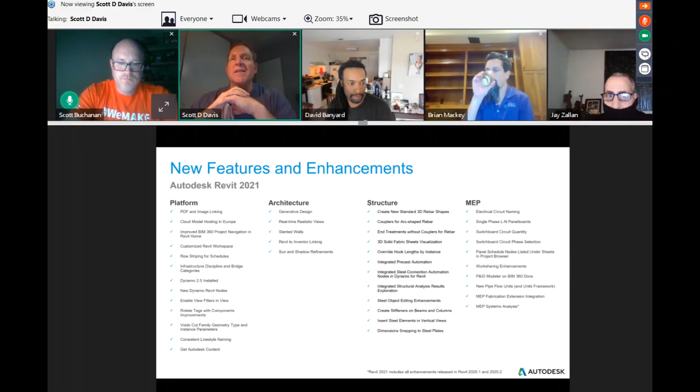Let's get that going. It is. You're sharing, Scott. Oh, it is. Okay, good. Well, I'm looking at a camera beyond. I'm looking at my own video.

All right, so platform stuff. Here's one where the work really started last year in 2020 and has improved in 2021. So last year we started the ability to actually insert PDFs into your views and sheets and things like that inside of Revit.

Well, obviously, if you've got a lot of PDFs and you're using 600 DPI, 30 by 42 PDFs, and you're trying to stick those in sheets, the more of those you put in there, it was doing a lot with file size and things like that. Just a lot of graphic information as an image file to bring in.

But you can also link it from a BIM 360 page. So if you guys are using BIM 360 Design or BIM 360 Document Management, you can actually store those image files or PDFs there and link them through the cloud, so everybody's using the exact same version of those documents all the time.

You also see... oh my God, the name just escaped me, where you're actually not naming a drive letter, you're just going a relative path, I guess I'm trying to say. There it is, it's right there. So relative path linking, etc.

Obviously, this is going to help with being able to have those PDFs and image files linked in, and then not do so much with file size and file bloat because they're just referencing in from an outside source. So great new advancement there.

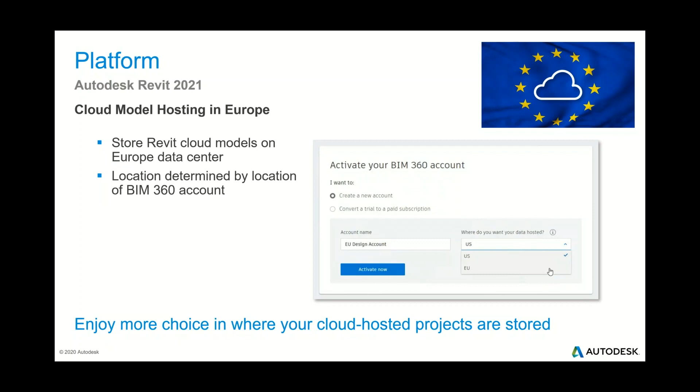Which one do you want to go into? Do you want to use the US server? Do you want to use the EU server? Obviously, there's a lot of territory rights and things like that going on. Some customers said that they had to have their data in Europe in order to use a service like BIM 360 Design. So a new welcome feature there for sure.

But it's really about separating out between recent files and the BIM 360 area, and giving you a much easier way to search. Just like if you're inside of BIM 360 in the web page and you have that drop-down list at the top where you can start typing in some characters, the name of the project you're in, it starts to filter that list out for you very quickly, and then you can go right to the project that you're ready to go into.

Now you're looking at your BIM 360 projects. You have this drop-down list at the top for both your accounts and your projects with a search box where you can search through these things. It makes it really easy to do. And we provided a link directly inside of Revit that takes you directly into BIM 360. So no more having to go launch a browser, then type in a URL, or go to a shortcut.

Those are all readily accessible right inside of Revit for you now as well. And then the last thing is just some easy access down to the help files, some of the online help, the what's new, which went live today.

That's one of the big points about doing this for you guys here in North America. This user group is actually the first one that I presented to. I'm sure you guys have seen a lot of things coming out today, but everything in Revit 2021 went live at some point today. I don't know exactly what time they flipped the switch, but now you should be able to go and get downloads. Your Autodesk desktop app should be notifying you that there's new versions available. The 2021 help file should be live, and I've seen a lot of bloggers and posts and things going on today all around Revit 2021. So that online help will take you to the 2021 page.

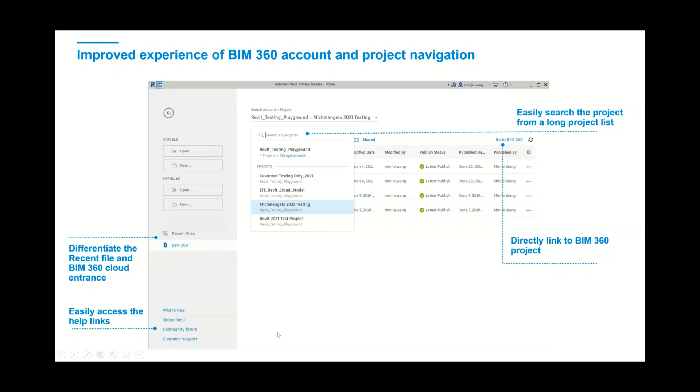Also, when you first get Revit 2021, download it and install it, as you're going through the initial setup, the one thing it's going to actually ask you first is a few questions if you want. You can dismiss out of this, but if you want Revit to help you set up a customized workspace for you, rather than just installing Revit and having every single tab turned on for all the disciplines, which you can still do, it's actually going to ask you, what do you like to work in? Are you an architect? Do you like to work in infrastructure?

That's one of our new categories I was talking about. What's your job role? And then what it's going to do is it's automatically going to set up Revit particularly for that, what you select on that. So in the case I turn architecture on and infrastructure, let's say it's going to have the architecture tab and the infrastructure tab turned on by default. Nothing says that that's permanent. Obviously, you can go back in and change those at any time.

The one thing it's not doing yet, and I'm sure development is working towards this at some point, is to then be able to save those as a user profile. So if you logged in, you could actually say, I want to save a profile called architecture because we're a multidisciplinary firm. And then I have another profile that's called MEP, and just easily switch those profiles, and it would switch the user interface around for you. But at least get you a little bit more of the way there upon install.

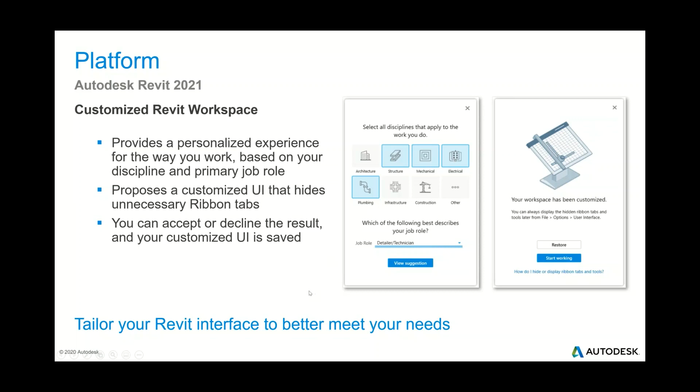Hey, Scott? Yes. Real quick, so is that just so they can track all of our movements rather than giving us full control or full access to all that data? Sorry, continue. I'm not sure what you mean by 'they'. I think maybe I know who you're talking about, but that's all right. No, it's not out there for us to track all of that.

All right, so this one's actually really big for anybody that's ever had to work on just monstrous schedules. This goes back to my own experience of being a project manager back when I was in practice, of actually printing out 30 by 42 drawings and having them on the desk next to me with a highlighter, trying to go from sheet view, real sheets to the computer screen, and trying to understand what row I happen to be on as I was trying to go through a door schedule or window schedule. And so now, just like Excel spreadsheets, one of the schedule properties is that we can actually tell it to stripe the rows, and we can tell it which colors we want them to be.

We've had a little bit in warm-ups today, a little bit of technical difficulty with some of our videos, but what we're going through right now is just showing you a view. It's actually in German, you can see in the tab up there at the top, a long scheduled list. On the right we're looking at that same schedule on a sheet. This is where your eyes would probably go crazy without being able to have this striping.

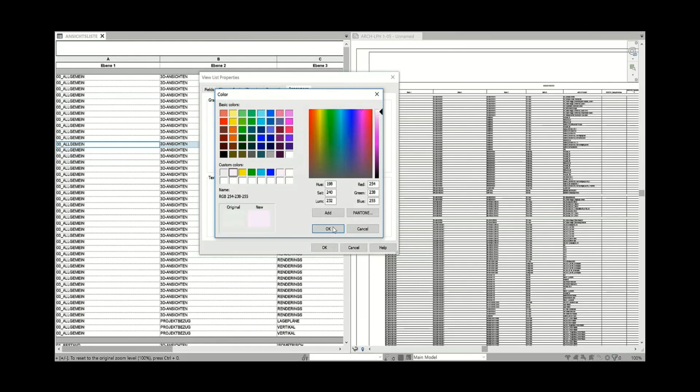So we're going to go ahead and say, first and foremost, show the stripes on the sheet. And then we're going to go ahead and pick some of our colors. We're going to pick our first color here, in this case this kind of pinkish color. We're now going to pick a second row, and then bam, in just a second the schedule view and the sheet view both update with those stripes.

And if you don't want to see it on the sheet, you could uncheck that, and then it's going to go away in the sheet and still show it to you in the schedule view as well. So just a much easier way of being able to understand schedules, especially when you have something on the right, which is a full page, 30 by 42 of one giant door schedule or window schedule, and you're trying to make your way around that. Should make it much easier for you guys as well.

So there are some new categories this year. You guys that have been in Revit for quite some time know there's always been architecture, structure, mechanical, electrical, piping. There's a brand new category this year called the infrastructure category. Maybe that roads category that's actually in Revit will someday become something. I don't think we did anything with it yet, but for those that have used Revit for a long time know there's been a category called roads for quite some time. But this new infrastructure stuff is actually more in line with what we're doing around bridge design.

So Revit's become a very powerful bridge design tool, especially when coupled with something like InfraWorks to do some pre-planning. You can actually lay out a bridge in InfraWorks, and there's a workflow to take that information from InfraWorks, bring it right into Revit, and then start doing your detailing, doing some rebar and some other concrete work. Scott's going to show you some of the new rebar tools we have in a little bit. Along with that comes a whole bunch.

Yes sir, sorry to interrupt. Last month when Marcelo was in doing some of his work, in the Rhino Inside Revit presentation he gave us, he actually used the roads category. Oh did he, alright. I'll have to talk to Marcelo and see what he did with it. Getting geometry, and he made roads, and in Revit they were roads. It was great, so nice. Just wanted you to know that. Yeah I may have to go back, did you record that session? I may have to go back and watch it and see what he did.

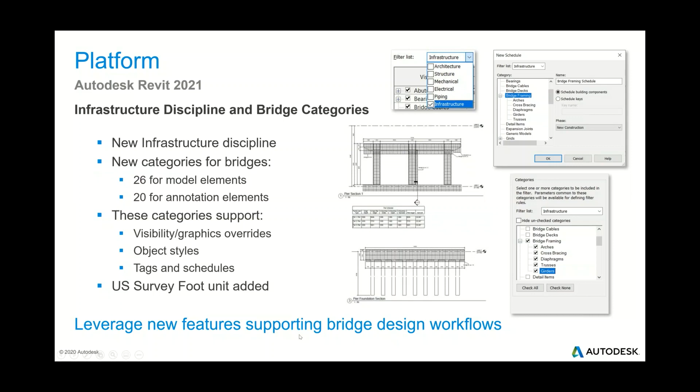All right, Dynamo. It's not new to 2021, but what's new is that it's Dynamo 2.5. In 2020 it was Dynamo 2.1, if I remember correctly. What we've done is made install of Dynamo mandatory for this release of Revit, meaning we've coupled Dynamo 2.5 to Revit 2021.

In the past, before we were doing this, you could go out and grab a build of Dynamo and install it on top of whatever version of Revit you were working in. So in an office or on your team, you might have somebody working in Dynamo 1.2 and somebody else in 2.5. And there was that incompatibility thing going on.

With this, setting the version for you inside of Revit depending on the release, when we release Revit 2021.1, then 0.2, and maybe 0.3 later this year, depending on where Dynamo's at, those could also get an update in their point release of Dynamo. So we're tying it to the release, making it much more stable and easier for you as users to understand that anybody in 2021 is using the same Dynamo build and install.

So some other really great things here, like being able to filter through stuff for internal application dependencies. A lot of great new tools inside of Dynamo. In fact, on the next slide we talk about 10 new commonly requested nodes that are now built into the Dynamo that gets installed out of the box with Revit.

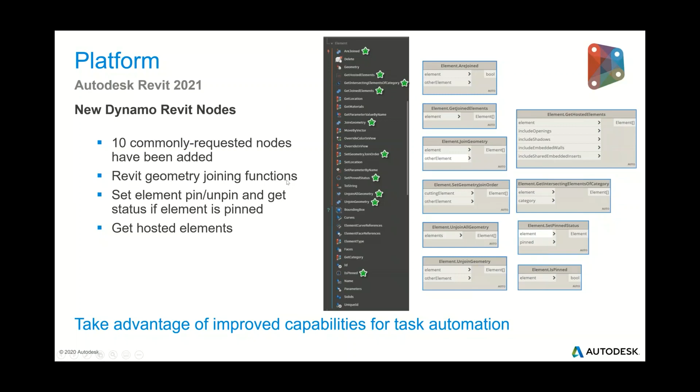Some of these functions were at some point created by other users. This is an open source community, and they were available through different packages. We've made sure we've now included those right out of the box because there were a lot of nodes that people really needed. In fact, I've got a list here of those 10 things.

When you look at the recording, or we can make a screenshot of this, you'll have the links as well of where on GitHub you can go to actually get these particular nodes, or get more information about them. Dynamo is an open source tool, not a Revit tool. You'll find all our information on dynamobim.org, and a lot of the packages are out on GitHub.

The way Autodesk deals with Dynamo is we're making sure that in our APIs, like the Revit API in particular, is working well with what's being done in Dynamo. That's our focus - making sure our APIs and tool sets work well with what's going on in Dynamo. But again, Dynamo is not a Revit product. It's an open source tool that's out there and available.

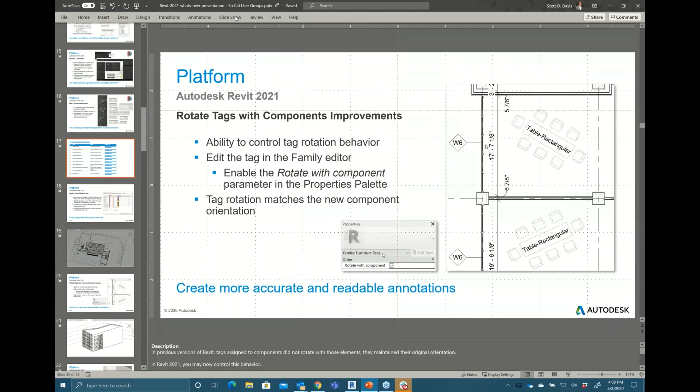In fact, you know what? Oh, darn it, now I hit escape and I didn't want to do that. Let's go back here, let me play it from this slide. And that's where we just were. There we are. Let me tab over because I have this in a Revit 2021 session and we can show it to you briefly. We're going to come back to that view there in just a second. That's something we're going to show you in a little bit here. Oh, I know where I want to go.

I want to go into floor plan view. And in this floor plan view, you're going to see that there's a view filter that's basically being set to say that anything that's been tagged as an interior element, like these walls, this door, are going to be colored in red.

So if I go to Visibility Graphics here, bring up that dialog box, you'll notice under filters now I have that new column, enable filter, right? So in the past, this is what you could do. You could turn off visibility. If I apply that, watch these objects actually go away, right?

So it's going to take us just a second to catch up in my view here. Do be aware that sometimes GoToMeeting and Revit don't get along the best. We're using GoToWebinar today, and it seems to suck a lot of resources and slow things down a little bit, but seems to be working okay at this point.

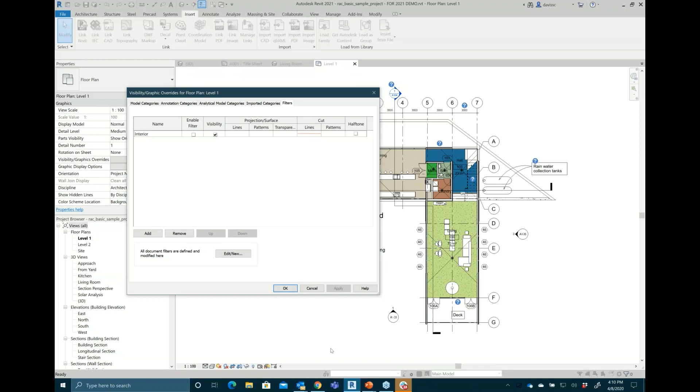So there's visibility off, right? It turned off all the objects, but what if I just want to get rid of that filter, maybe temporarily? I just want to see the walls or objects with their normal color, the normal object styles applied to them. So I'm going to just turn that filter off, visibility on. That's what it looks like without the filter. So now you have that ability to go in and do this directly inside of a view through the Visibility Graphics dialog box. So feedback so far, that's an awesome welcome addition to what we're doing.

All right, back into the slide deck.

This one is one of those things that's like, man, why did it take so long? It's one of the things that's been annoying in Revit for quite some time: the fact that some tags did not rotate with their components. So things like a furniture tag, a lighting fixture tag. This table, if it was non-orthogonal or rotated, the tag would still be either 90 degrees horizontal or vertical. There was no in between, no rotating that tag with those elements.

So now we've got a brand new behavior in many of our tags that says rotate with component. It's off by default, so what you're going to have to do is go edit that tag, basically turn this thing on in the properties in the family editor, then reload them into your project, and then they'll align.

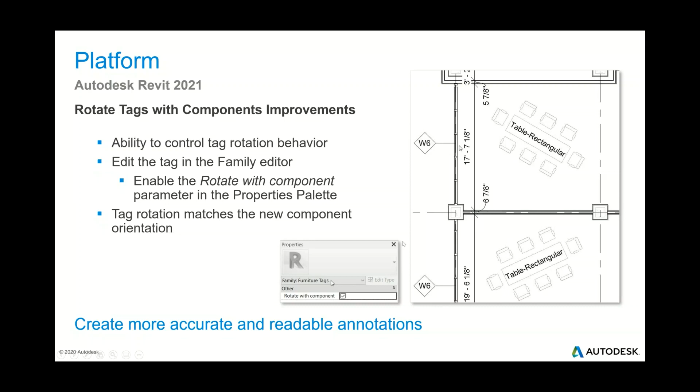So we can take a quick look at that. I've got a quick video to show this. This video gets a little bit pixely from time to time, but maybe it's all right. So there's that furniture tag. We're actually just going to go edit that tag. So now we're in the family editor.

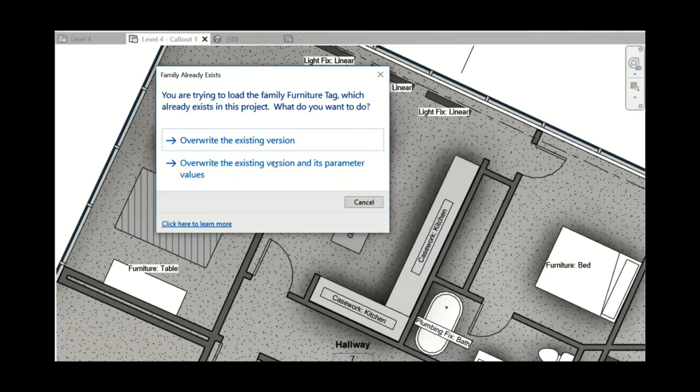We're going to go to the properties, turn on rotate with components, and then basically save and load this right back in and overwrite those existing parameters. And bam, now you see that that tag's actually aligned with that sofa. If I rotate the sofa, that tag's going to go with it as well. Obviously this helps you clean up your drawings, make things look a lot more presentable and nicer than they do. There's the lighting fixtures doing the same thing.

Again, another one of those little small things, but it's definitely something people are really appreciating, finally being able to have those tags rotate with the families they're associated with.

Oops, escape, back up. Darn it, what was that? Oh my gosh, sorry guys, I just really jacked that up. Okay, let me go back over here. Oh, darn it, sorry. Where was I? Somehow I ended up way down in the PowerPoint.

All right, we're gonna start right here. This is actually a really great new tool. So everybody get ready to go rebuild some of their families, because that's what's gonna happen with this particular new feature. The void cut family geometry type is now available as an instance, a type, and an instance parameter.

So basically now you can associate a void - in this little section here it actually is a void - you can assign it to a parameter, in this case a yes/no parameter: does it cut geometry or not? And then associate it with a type, so if you switch from one family type to another, it can turn that void on or off. Really, really welcome addition.

The way people were tackling this in the past was to create voids, put parameters on them, and actually move them completely out of the way of the object. So if you switched family type, it would take this void and shove it off into space, and if you wanted to cut, it would move those parameters back to interfere with that object and then cut. Now we can do that directly inside the family editor using voids and controlling them with parameters.

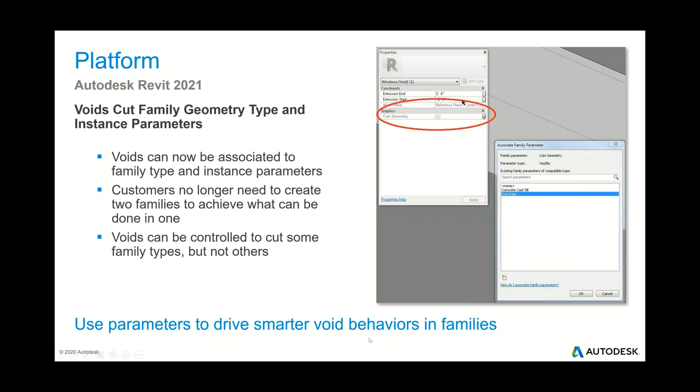On to this next video - this is going to show us the old behavior and the new behavior. Here's this windowsill, and in this particular case you could control the visibility of the forms and associate them with type parameters. So we're going to say this is a concrete cast sill with a drip edge, and we're going to zoom in tighter here to focus on this little drip edge in this concrete piece.

Now what we can do is take that void form and associate it with a yes/no parameter, tell it to cut geometry, and then associate it with that parameter, drip edge. Then for the family type we can say this one is with drip edge, and this other family type is without drip edge. So now when I switch back and forth between those two types and apply that, the void doesn't cut any longer, or now it does cut.

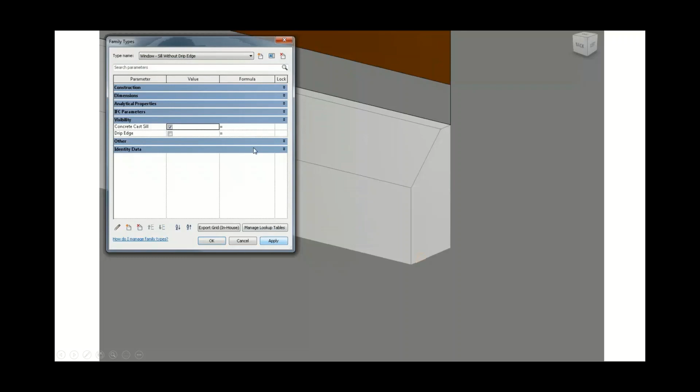So huge welcome addition. This is just one little example, this windowsill detail here, but I'm sure you guys are going to come up with a whole bunch of creative ways of how you're going to make that available and use that in your own families.

All right, a couple of other little things we've done in the platform this year. One is that we've made line style naming much more consistent. The first thing we did is take all of the hard-coded Revit out-of-the-box line styles and make sure each one was named the same way, with brackets or carets, the less-than, greater-than signs on each end.

But I think probably the bigger improvement is that we put them at the bottom of the list. So your own line styles are now always at the top, and all of the Revit out-of-the-box ones are always at the bottom of the list so they're not cluttering up your view. I think that's going to be a really welcome addition.

The second thing is kind of small, but - oh, was there a question regarding the line types? Why don't you let us get rid of all of them? The words medium lines, thin lines, thick lines - what does that even mean? So why can't we just delete them all?

It's maybe a long-winded response, but the thing is our regression farm actually tests Revit against itself—every new bit of code that goes into Revit, every hour of every day. That started back at Revit 1.0 when those categories were there, and that regression farm still uses some of those tests because there were bugs back in the day with those particular line types, and we still have to test against them today. If we remove them, our regression farm that's testing Revit's stability and bug performance gets out of whack. So things like the single family flush door family are kind of standardized and part of the regression farm testing, so they have to be there.

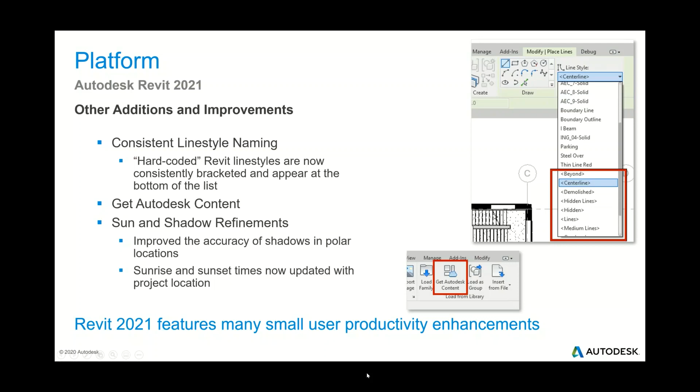All right, let me pause for a second. I don't see any questions in the chat window yet. So you guys are just mesmerized, I guess, at this point. Don't have any questions. But actually there are a bunch of questions.

Everybody, I get it, the audio was bad. Don't worry, I'll fix that next time if I ever play music again. Apologies. David Banyard is having problems getting in. He's in the attendee list, I guess, but not as a presenter, though he's tried to fix it. His comment just mentions that filters can be applied in very cool ways to animations now. He had wanted to add more, but maybe we can get him on before the end of this. Shobit, if you're in the background, maybe he just got an attendee link instead of the panelist link. I'm not sure what's going on there, but I already sent him the link.

Do you see Karen's question? Karen Kenzik from USC asked if you can get partial content, not just all of it—let's say you only want doors. Yeah, so I think right now it's a download of the whole package for North American content, but I think that's part of this content delivery system we're working towards down the line, that idea of 'I only want this, I only want just the doors, or I only want this specific door out of the box content library.' I think those are some good ideas about where we're heading with families and content.

So let's jump into a few of these. Now my slide's not advancing. There we are. So one thing that we've been working on for quite some time is this idea.

This tool is now called Generative Design for Revit. Some of you might have known this by its project code name. For a long time, we were calling this Project Refinery, and that's typically what happens when things are in beta—they're still in their code name. So if you had the opportunity to work in Project Refinery, it's now available to be installed in Revit. It's an add-on. It's not going to install by default, but it's easy to go get, and you can install the Generative Design for Revit toolset, which is going to do a lot of things.

First and foremost, it's basically using Dynamo in the background. And what generative design is all about is doing a lot of iterations on objects very, very quickly, much more quickly than we might be able to do in a more manual way as architects and designers. So for instance, there's a few different out-of-the-box generative design scripts that you can run or studies.

One of them is this idea about office workspace layout. What this is going to do is allow you to pick a particular space, an area, then basically place a piece of furniture inside of that—in this case, these desks. And then we're going to set up some parameters. We're going to say what's important about these desks and how they're laid out: their overall rotation, the spacing between the rows, the average distance to an exit, the views to outside, and the actual overall number of desks in that particular room. Then we're going to go create a study.

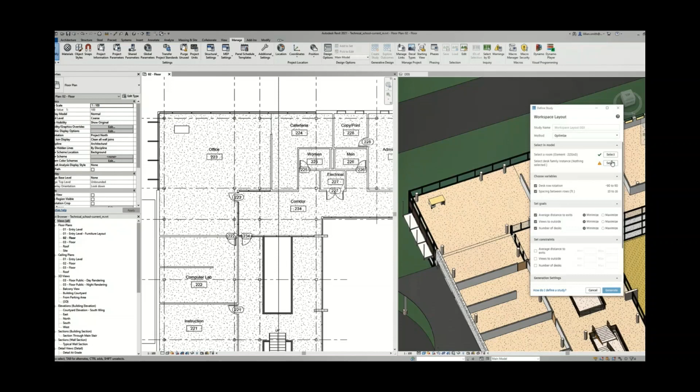There we go. So the first thing we're going to do is go and do a create study. This is going to launch the Generative Design panel. We're going to go into the workspace layout. We're going to select that space first, then select the piece that we want to be in there with a desk. We're going to set some of our goals here by checkboxes—these are all being run by Dynamo. Then it's going to go ahead and produce that study. Now we can go and explore these options as soon as it's done. You can see it's up to 900—there are 1,000 different choices that it made there very quickly.

And we can go to these graphs. We can start reducing down the overall number of the different results that are there. We can start exploring what they look like. And when we get to the one we like, we basically say create elements in Revit, button down in the lower corner. And there's all of those desks aligned to that study we just did. Last step, get rid of that kind of placeholder desk. And now we've got the results of that study.

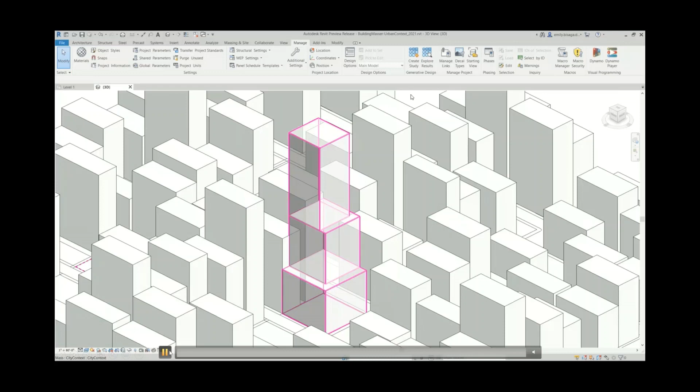There's other ways that this can be used as well. There's another out-of-the-box generative design study that can be done. This one is about being able to look at overall building context. So we're going to use the building massing tool study. We're going to maximize for different outputs here. We're basically trying to figure out—there's our bounding box that says these are all of our setbacks for this particular tower.

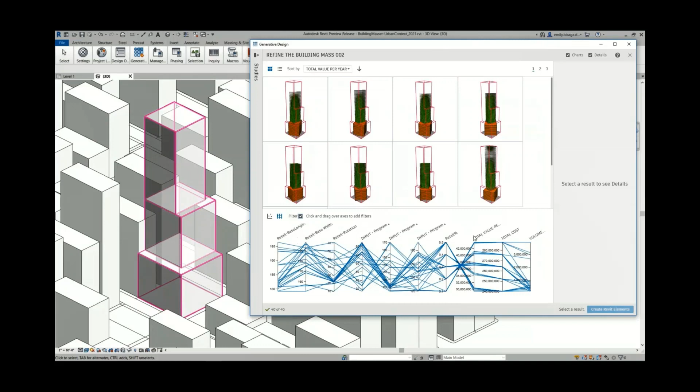We're going to look at things like the overall height, how many floors, the overall dollar value assigned to each one of those floors, make some filtered results. And then once we're satisfied with that, we can bake those elements right into Revit.

So some really cool studies are available in Generative Design, and again this is all fed by Dynamo. What I'm really looking forward to is seeing what the community does, because being an open source community, you guys can make your own scripts that run Dynamo and tag into Generative Design, coming up with really cool stuff for your own layouts. I'm excited to see what you guys might do with that.

All right, so next couple things. I'm almost to the end of the architecture before we throw it over to Brian to talk about structural. Yes, Scott? Go ahead. Just before you throw it to Brian, let me know, there's a couple questions we'll get to. Okay, perfect.

So a couple more things. This is, for me as a former architect, probably one of my favorite new tools. This is something that's going to take the place of the old realistic view in Revit. As you guys know, the view control bar at the bottom of a 3D view or perspective view has hidden line, shaded mode, a couple different categories, and the very bottom one was realistic.

I wish there was a way to poll the audience here, because I'd love to see a raise of hands of how many people actually used realistic view in the past. I think generally the experience was you turned it on and waited for that scene to bake, so to speak, and it kind of rendered. It was pixelated and it got better. Then you were in a live perspective view and went to move around, or pre-highlighted an object, and you had to wait again. It was very slow and very clunky.

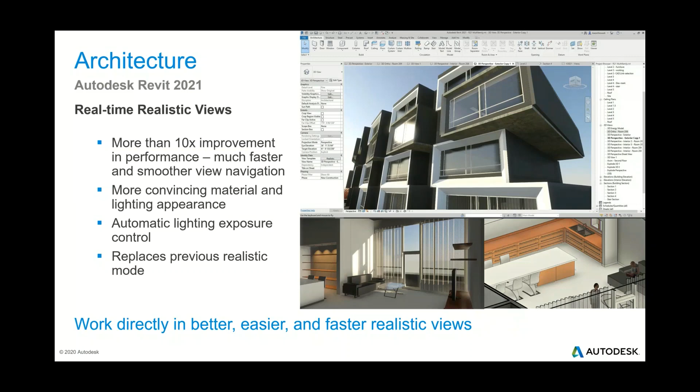It has very good lighting quality with automatic exposure control built in. So if you're walking through a scene and go from outside to inside where there's no artificial lights, it will automatically re-expose that scene so you're not just in the dark, so to speak. Let's go take a look at this, because it's really, really cool.

So I'm going to jump back into Revit 2021. We're going to go into this view. For those that don't know what model I'm in, I'm just using the Revit basic sample project today. But I've done this on my own in one of our data sets - this is actually a building on Qualcomm's campus down in San Diego. This Revit file has 18 Revit files linked into it - here's all the files. Complete site plan, and this building has complete fire protection, mechanical, electrical, plumbing, structural, architectural, full furniture inside, everything.

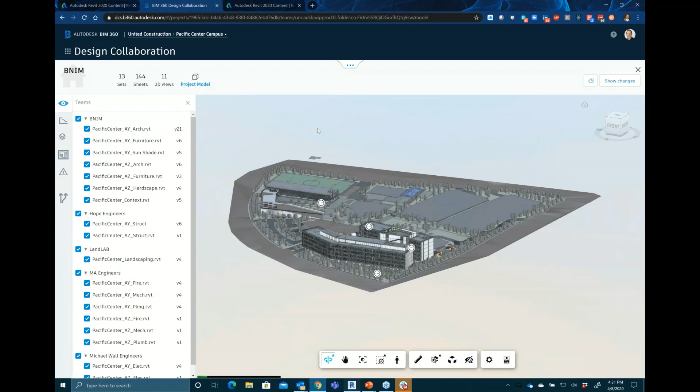Anyway, I loaded that up on my Surface Book 2, went into this new realistic mode and walked through it, and basically didn't have any hesitation at all on a big giant model like that on a Surface Book - it was moving around quite well. We tested that through Zoom and GoToMeeting, and it just doesn't work in that big of a model when I'm also presenting through video here, so I'm using the sample basic project. It moves around a little better, but don't let the size of this model fool you - if you guys try it on your models, I'm really excited to see what you think of this tool.

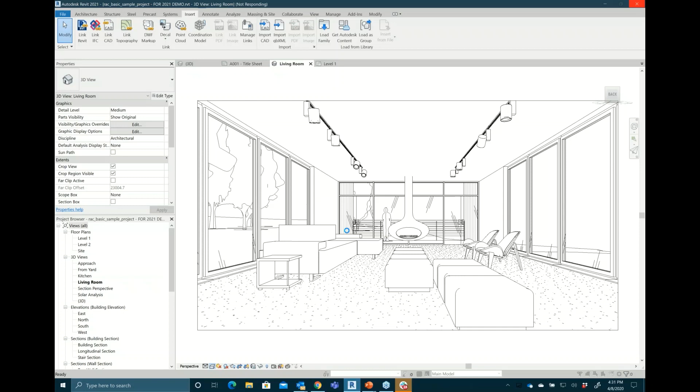So right now we're just in a normal hidden line mode. I'm going to go down to my graphics controls - we're going to do a couple things here. First, I want to show you some of the new exposure settings in this dialog box. In fact, my Revit's just, because of GoToMeeting, I think it's chugging away here, it's a little slow today.

So when I go into the realistic mode, you'll notice we have a new slider control for this automatic mode. Right now I'm not in realistic, so it's grayed out. So let's go ahead and flip this to realistic.

Another thing I might want to do here, maybe I don't want to show edges. I could do the anti-aliasing, but just for sake of time, I don't want to have to process all of that as well. I'm going to have it cast some shadows as well. I'm not going to do ambient shadows.

You can't do sketchy lines in the realistic view, right? Because it's more kind of photoreal, so to speak. Your depth cueing also doesn't work in these views, but that's all right. But your lighting control does.

So right now I'm on an exterior sun only setting. I'm going to change this to an interior artificial only and leave them as their default. We're going to go realistic, and then I'm also going to change the background a little bit. I picked a couple dark colors that makes kind of a nighttime-ish looking sky, just doing it very quickly.

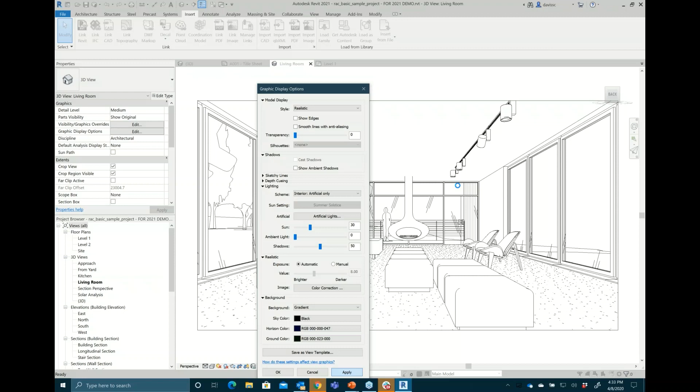So when I apply that, what you're going to see in this scene now is that all of this stuff is going to be rendered. It's pretty darn good. I know I've seen other real-time rendering engines out there that I think are really good quality, but being inside of a design tool and being able to actually be in the scene - now check this out.

This is a perspective view, and you guys know that over the last few releases, we've actually been enabling more and more perspective view editing of the tools. So basically they're all on right now.

So I can highlight any one of these objects, right? Not only can I highlight them, I can work on them. So I can delete - if I just delete this little end table out of here, it'll get removed from the scene. Probably pretty subtle, but the reflection in the glass changed. The shadow underneath that little dining table also changed. This gives you the ability to actually be inside of a scene and work on it and see the results update instantaneously.

So if I go Control Z, undo that end table deletion there, you'll see it pop back on - watch back here in the glass and the shadow underneath it, taking a little bit longer than it normally would if I wasn't on GoToMeeting. There it goes, it's basically re-updating the scene.

Now, to go along with this, we've also introduced a new tool. You might notice that over here on this control bar, it's the new fly mode, right? In the past, without fly mode, if you wanted to go walk around the scene, I had to get everybody's favorite tool, the steering wheel, out and click on walk, and then I could walk through the scene. And then this little steering wheel would follow my cursor around. So no longer - for anybody that's done any video gaming whatsoever, you just enter fly mode now.

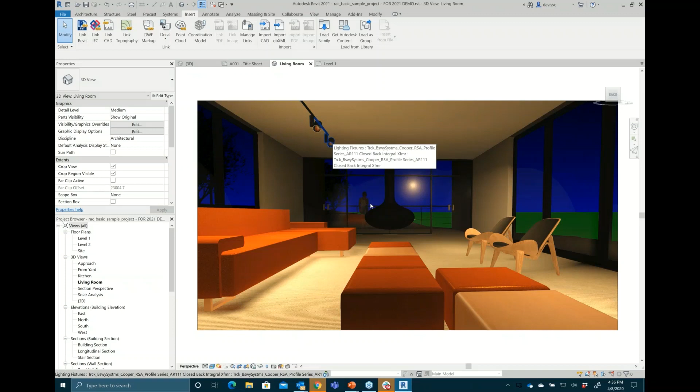So if you change the color temp, the IES file for the light, these guys have a parameter that can control the angle of the light. If you control the angle, you can see something over here - often, depending on time of day, that might actually be the sun way off in the distance in my nighttime sky. But it's a really cool way to be in a scene, editing color, material, objects, lighting controls, everything else live on the fly, and also navigate around that scene in perspective mode and work. Probably one of my favorite new tools. Hopefully you guys like that one as well.

The last thing I want to - sure, it's kind of on point with what you were just talking about. Tesla's asking, since the images are now links, are material mapping going to be supported? She put in BIM 360, but I just want to know at all, and also extended in BIM 360.

Materials are something that we're working on. I haven't seen anything that made it into the 2021 release as far as being able to do linked materials, whether through BIM 360 or not. But I know it's something we're working towards, and I don't have any concrete dates or releases on those kinds of things. In this particular release I haven't seen anything, so I'd have to check it out to get a verified answer for you, but I don't think so at this point.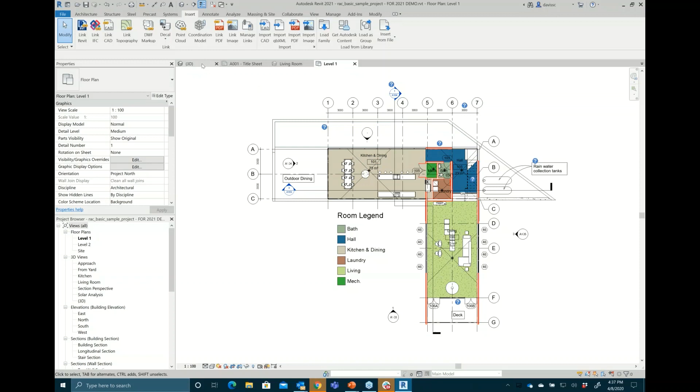Okay, was there any other questions? I'm way over on time, aren't I? It's all right, yeah. One of them is probably quick, I'll tell you. Well, correct me if I'm incorrect.

I'll answer it. The question from Ashley is: will generative design be a feature, option, plugin, or usable for MEP and structural? My answer would probably be, yeah, baby steps. The lighting is kind of part of MEP, so this tool is the first implementation. It probably has very little or limited functionality, and will grow in the next several years.

Yeah, I would second that. It's easier to take building blocks and things like that and shift them around and do some simulation as opposed to connected systems and those types of layouts. But it's definitely on the radar because I've been asking those questions myself. I have seen some people use it to do layout of just the light fixtures and/or the diffusers, and then still have to manually go through and connect the ductwork. But it's not going to go through the whole entire duct run for you.

How about an interesting question for some of the people? Why - and it may be a slow pitch for you - why was survey feet added? I'm not the civil guy, I'm not sure. You guys have that answer? Scott, Brian, any idea? Lane? I don't know if I'm supposed to say the answer.

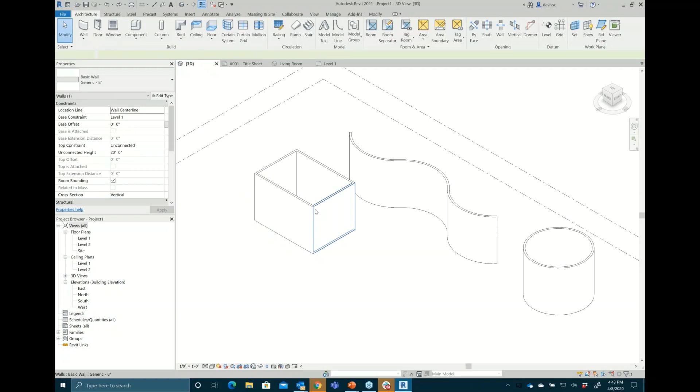This is the last feature I want to show you, and it's actually pretty cool. Right now this is just a normal wall - a standard basic 8-inch wall. But I'm going to go to this wall, zoom in a little tighter, take this little grip right here, and just do this to it. Let me zoom back out. Did anybody see what I just did? No massing, no wall by face, nothing else required - I just made a slanted wall by simply grip editing the top of the wall and leaning it over.

Got a little golf clap from Scott Buchanan up there. We now have the ability to... I got to interrupt, man. I got to interrupt - awesome. Let me continue, Jay, and then you can rant.

So the other thing we can do is that in this case, all walls now have a new parameter called cross-section. You can set them to be slanted, or if I go to one of these straight walls that are still vertical, I could change this to being a slanted wall type instead. Then I can control the angle either by grip or by typing in a value. So if I want that to be a 15-degree slope, I can. We can tilt that in.

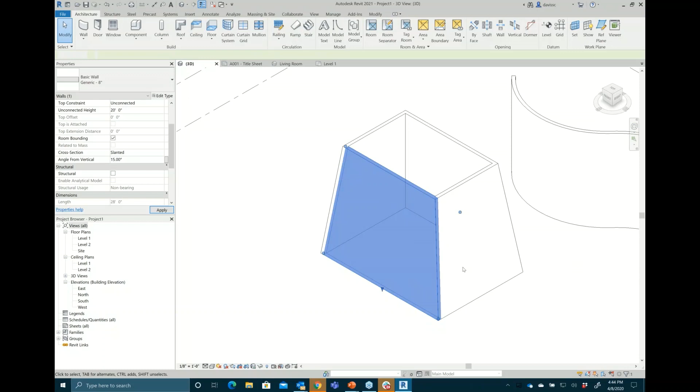These will respond to attachments if the walls are attached to roofs, etc. Yes, it also works on curvy stuff. If I go into this wall style and say I want these slanted at 10 degrees, it works on that. If I want to make a cone-shaped building, I can tab select into this cylinder down here - we can turn these into slanted walls and give them a projection. Maybe I go -10 degrees on this one, and they'll tilt in or out - negative to go in, positive to go out. And they work with all different wall types.

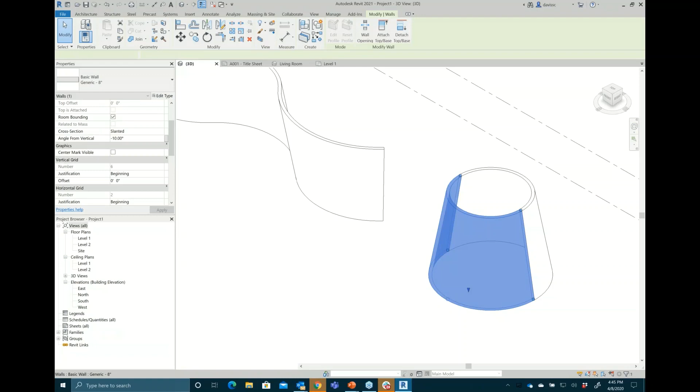So if I go into this cone-shaped guy here and switch this from being a basic wall type, and I want to do something that's a curtain wall system, we can do that. Select maybe a storefront from the list, and now, once it recalculates, I'll have a slanted storefront curtain wall system applied to a cone-shaped object.

So finally, a tool that I think is a really welcome addition. Is it 100% feature complete yet? Can you do all kinds of crazy stuff with it? No, Jay, there's probably a lot of stuff we still need to work on. In fact, I'll show you one of them.

So if I go into these wall styles and into the out-of-the-box wall style, it has a bunch of sweeps added to it, which is this kind of brick on CMU and metal stud that's got a parapet cap and some brick sweeps embedded in it. You've all seen this wall style, I'm sure.

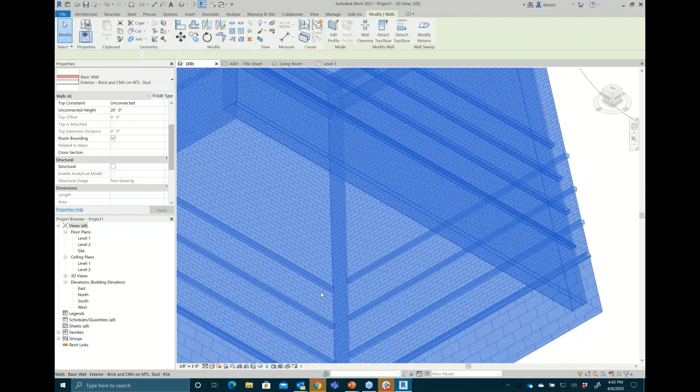One thing you'll notice is that wall joins, when doing slanted walls, only have the ability to butt. They don't have the ability to miter. So right now my sweeps don't know how to wrap the corner properly, so I'd have to grip these and pull them out as individual wall sweeps. My parapet cap in this case is not perfect.

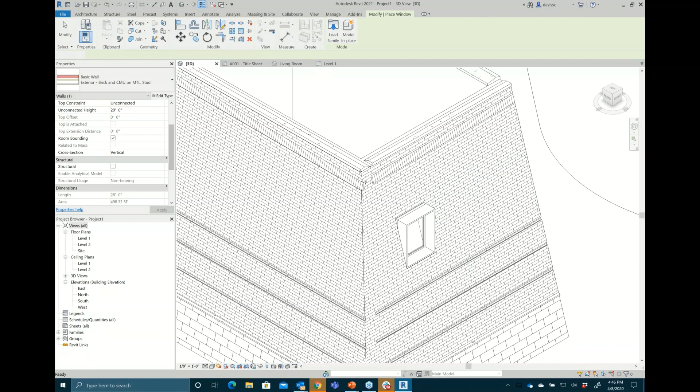But I should also point out that this also introduces a new parameter to hosted elements like windows, doors, and sweeps. So if I go into this window and place it, by default right now this window is basically popping out of that slanted wall. If I tab into that window and go to its properties, there's a new parameter inside the window called orientation. Right now it's set to vertical. We can set that to slanted, and now it will remain coincidental with the face of the wall. So if I tilt that wall at a greater angle, the window goes with it and stays in plane with that wall. Let's make this 25 instead, and you'll see the window goes along with it. So obviously a great new feature.

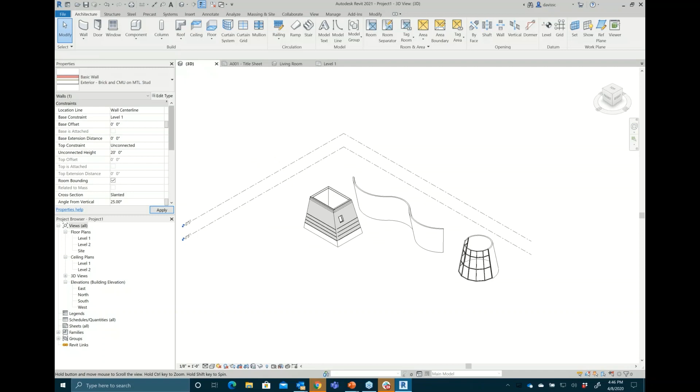Go ahead, Jay. Put that on screen. Where'd it go? It's on screen. I can't wait till people put doors in and make them coincident with the wall to where they don't open. Right, when it swings in the downward direction. Yeah, I'm sure that will happen. All right, but no, some of the construction needs to be updated, obviously.

I know they're working on it. It's just frustrating when I still can't use that thing for what it would actually be built as. The top and bottom need to be able to have variation. Not sure they do. And we also want tapered walls where both sides slant. We want the top to slant, and the bottom to be on the ground, and then the top to be parallel with the ground. Yeah, there's lots of things to do. This is the first iteration of it. There's definitely more to come for sure.

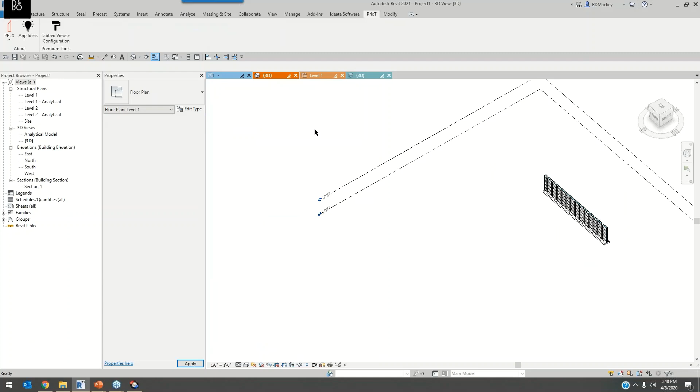I was answering that question. But we now have this beautiful shape editing tool inside of here. So if I come... I don't want that.

If I come into the sample structure project, and go grab this view here which I had open before, I started pulling out some of that support stuff. Excuse me here for a second. When I start looking at this, a lot of these tools now - and this is a terrible example, but...

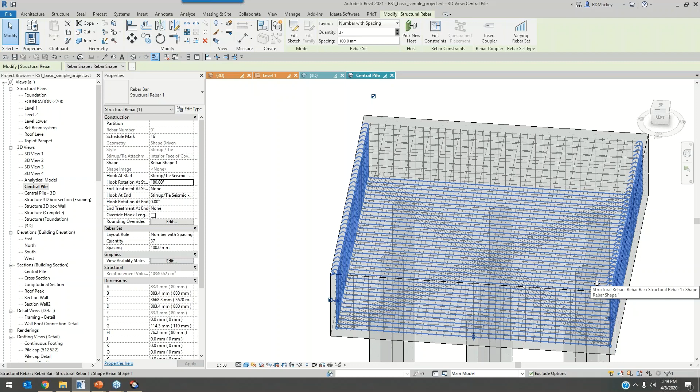If I grab a piece of any of my rebar sets or an individual rebar, we now have hook rotation at start and end. So I can choose to take that, and if I wanted to make that hook go the other direction, I can rotate it around 180 degrees. We were always limited to: hey, this piece of rebar was coming in, the hook was going this direction, and that was it, that's all we could do. We now can change hook rotation at start, hook rotation at end, and start tweaking those around, which gets us back into that scenario of being able to do these different types of bars inside of here.

Maybe you need to model some standees if you're getting that type of scenario. So it's a nice little application for us to be able to change the rotation to any rotation we want on that, which I've been using a little bit to cheat with some of the slanted walls as well. Oops, that's not what I wanted to do. I'll hop into that and talk about that in a second.

So we've had couplers for a few releases of Revit. They always worked great on straight bars as long as the reinforcement line was perfectly straight. Now we've got the capability to do it on curved bars. I will say that the curved bars must be tangent - if they aren't actually tangent, then the couplers still aren't going to come in and look proper the way we needed them to. So again, just a little feature, but kind of one of those things.

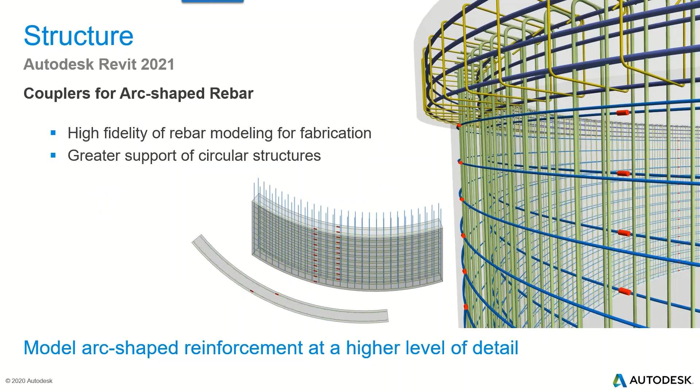I think this is mostly requested more in the European area than the US. So if you do have some couplers going into some of your bars and that's going to start working, then we actually have this new thing on here - and I should have updated this slide.

We have what are called end treatments at start and end treatments at end. So if you are coming up to a coupler, you need to say this is going to be a welded coupler or it's going to be a threaded coupler. You have the capability to go through and just define that in your reinforcement. That value is able to be scheduled, and I believe it's able to be tagged. So just allowing a little bit more information going into that reinforcement as we start setting that up.

This was a minor little thing that they added, I think in 2021 - the fabric sheets. We had the fabric sheet representation, it'll show our overlapping of the sheets, etc. They now added consistency to look with the reinforcement, so we can actually view those wire fabric sheets as solids as opposed to just single 2D lines, which we didn't have the capability to do before.

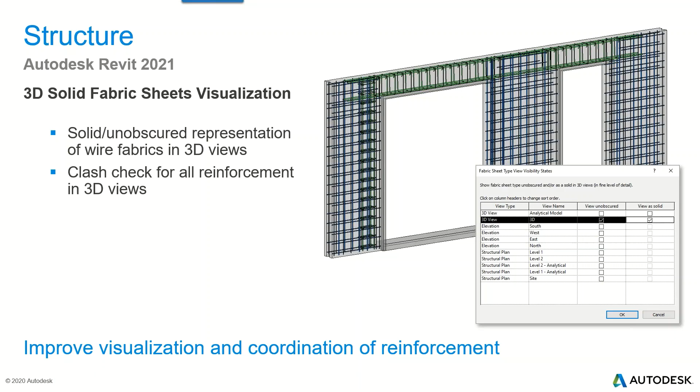I don't know why this slide has it on the vertical - I've never seen fabric sheets on a vertical reinforcement, but you do have the capability to go through and add that into those. So it's a kind of nice little feature, and it is consistent with what's going on with reinforcement, so I really like that feature as well.

I first saw this when I was playing with it in the beta - there's a new checkbox, and you do have hook lengths, and you can go in and check override hook length. When I got into that, I didn't know - for those who've dealt with this, you get all of these parameters out of the box with all the different pieces of reinforcement. As you create your reinforcement families, you get to choose which ones are used. I was really struggling with going, okay, I unchecked this, now which value is going to come in? What I've noticed is as you start going in here, before this override length dialog box is checked, you can actually come in and see which one's grayed out.

The one that's grayed out has been assigned to hook length. When you check that box, the grayed-out value becomes solid, so you can go in and start changing your values. So if we wanted to make the hook length a little longer than code minimum, it'll let us do it. It will also, unfortunately, let us make it smaller than code minimum, so I'm not sure if I like that. Just one of those things to be checking and getting into, but yeah, it will allow us to get in and play with that.

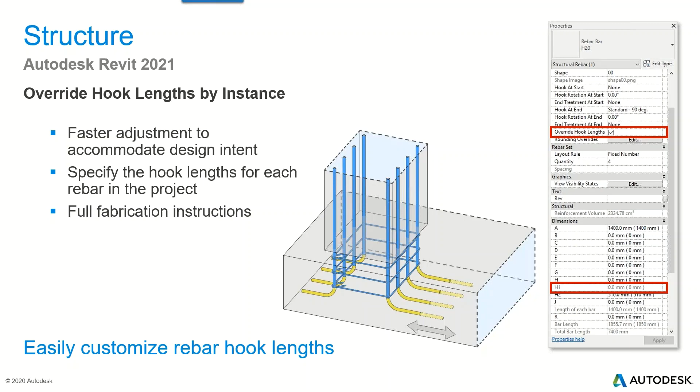Sometimes in a scenario like this, rather than going in and rotating the individual bar, what's nice with that hook rotation is if you did have a hook on that, you could just rotate these side ones out if you needed to, to be out at an angle. It's a nice little feature rather than going in and grouping your bars - it's not a group, it's a set - removing the set from your reinforcements and then having individual bars and rotating them in those corners where you need it. You can actually just rotate the hook on that as well. It's a really nice feature to be able to go in and set up.

So precast has been preloaded. This used to be an additional add-in to Revit, but now it gets installed automatically when you start installing Revit. So yes, all you MEP and architectural folks, you are going to have a nice precast tab up in your ribbon. I believe this can possibly go away, as mentioned early on, with the settings when you install the software. I personally stick to that, so I got all of the toolbars. I haven't found a way to turn it off otherwise, so it might be something to pay attention to if you're really going to hate having all this nice precast stuff.

They did actually start supporting Imperial Units, because since this was an add-on that came from outside of the US, it was originally Metric Units. So they've got that going on, and they've actually allowed some more modeling overrides for some of the assemblies. So we've got a little bit more flexibility on some of the assemblies to start going in and using precast as well.

As with everything else, with the new Dynamo 2.5, they've added some more nodes. This is going to be more geared towards steel connections. There's been a lot of improvements, which I'll talk about in an upcoming slide, but they've actually added a lot of this stuff getting into some of those steel connections. So if you have a lot of steel connections that they can play with, you can now start adding those steel connections, getting into the Dynamo side of things as well. It's really nice to get into, and I believe they even have some sample scripts for some of the Dynamo stuff for structure, not only just for steel, but some from other things like analysis as well. So they've added some more sample Dynamo scripts as you start getting into it.

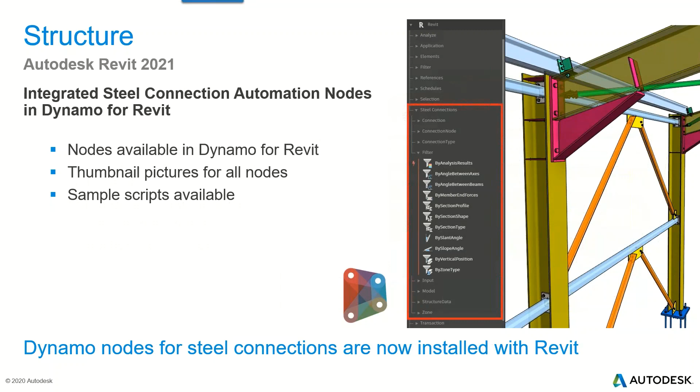Now, I'm not 100% sure on this one, and I wasn't able to find an answer from last night - somebody asked - but on the ribbon there's analysis results. You can actually see some of the analysis results. I believe this only works with Robot, so I'm not 100% sure on that, but I do know you can start bringing some of the analysis results inside of Revit if you're using Robot Structure. You can start saying, I want to see what are my reactions, what are my deformations, what's going on in some of this stuff, and you can get a visualization of that. I think this would be great for those firms that are using Robot structural analysis - for the engineers doing the analysis, and for the drafters/modelers to be able to actually see some of that analysis inside the Revit interface for what they're familiar with. So I think it's a great little feature, again, if you're using the Robot interface.

So anybody that's been using this at all - I don't know if anybody's really jumped into this - this is a tool that I'm also suggesting a lot of architects can start looking into as well.

So I think it was back 3 releases ago that Autodesk started adding these steel connections, and they were pretty basic at the beginning, but a lot of different tools would come up inside of here. One of the biggest complaints we've had in the past is the capability to copy a connection that we've set up on one beam and column or one beam to beam joint over to other ones. We didn't have that capability, so a big new release allows us to copy those connections from one beam to the next without having to go through the whole dialog interface to set it up. So it's a nice little thing to get set up.

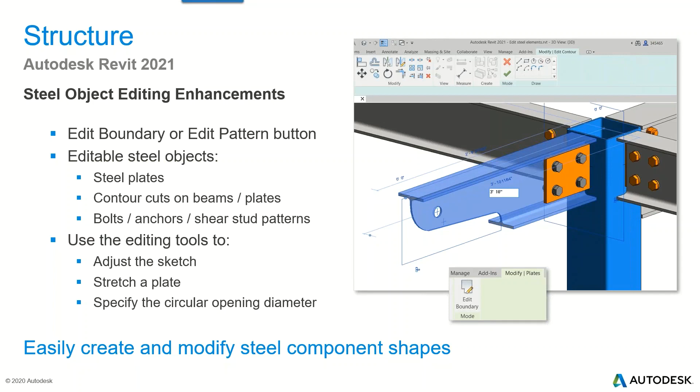So a nice little feature as you start going through and really start jumping into that, being able to edit some of those steel objects that were kind of fixed in the past with this tool, but really starting to open this up for us a little bit more.

So one of the new parts of this, the structural connections, is going to be stiffeners. There's actually a new dedicated tool just for stiffeners where we can go in and say, I'm going to add stiffeners at this point. Different snap points for selecting those stiffeners. They can be aligned more easily, copied more easily, and with another feature on the next slide, center lines coming in, making it easier to document and dimension to those things as well. So again, another nice little feature coming in here, playing with and editing.

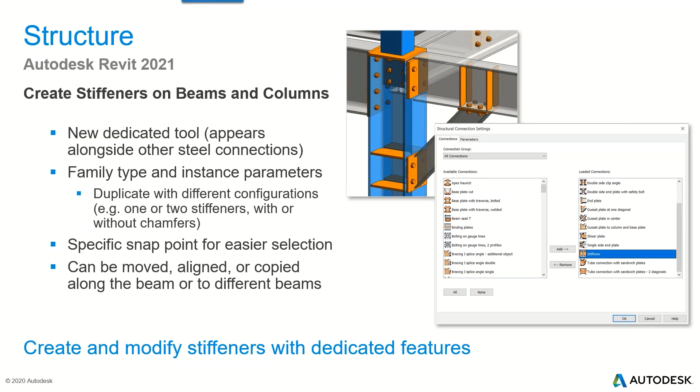With all of these steel connection tools, what is great about all of this is if you change beam sizes, or you're going through and adjusting as you go, as long as those structural connections haven't been ungrouped or exploded, whatever the term is, if you change a beam size, all the connections will start to update and reanalyze as it goes through. So it's a great little feature that's happening.

They also fixed a minor feature that happened in the past. If you tried editing a structural connection through the type dialog, the type properties, it would actually tell you the beams are still being calculated. So there was a minor bug that I know they fixed in this release as well. Kind of a nice little add-on that I don't believe is documented anywhere either.

They've also given us the capability, ironically, one of the few things in Revit that you could only do in 3D - we're playing with some of the structural connections. So now they give us the capability to get into some of the 3D aspects of these things, and not only in the 3D view, they've added the 2D views as well. I always thought it was odd that this was the one feature in Revit that you could only do in 3D and not in 2D as well. So that's been put inside of there.

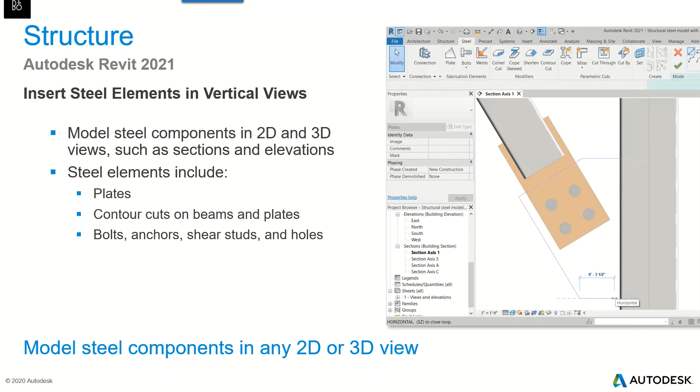So we can edit things like contours, beams, steels, bolts, a whole bunch of those different tools. Another little feature they had in here is before, when we added steel plates or a lot of the different types of things in there, there was no center line. So a lot of my clients were drawing a little detail line in an elevation simply so they could dimension to it. They've now added, with those steel plates, not only in elevations - your X, Y, your Z - but also the thickness.

So they've got the center line reference points in all of the views, making it easy to dimension.

Before I jump into the MEP for Scott, I wanted to jump back to Revit and talk about a couple things, starting with sloping walls. If you have a sloping wall set up with reinforcement, there's a couple things to know about sloping walls. As Scott said, this is version 1 of what we're getting into.

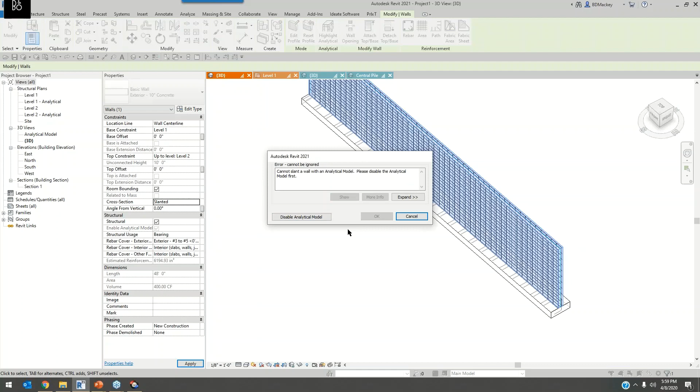The second I change this wall from vertical to slanted, if you're using the analysis, it just gets rid of it. You cannot do analysis on slanted walls, even if the wall is still vertical. It disables the analytical model, not only on the wall, but on the footing associated to that wall as well, so you'll notice the enable analytical option gets grayed out. That's not even because the wall's slanted, it's just because the wall's definition has been set to slanted.

If you are getting into this—let me change this to be a little more drastic, a 5-degree angle—if I slant that wall, you'll notice some of the reinforcement goes, but not all of it. If you're using area reinforcement, that area reinforcement will automatically pivot and rotate with it, which is great. But if you were just placing reinforcement sets or individual bars, those don't understand that they're going out of it. The more concerning part to me is they're also not even flagging it as a warning that the element is outside of its host.

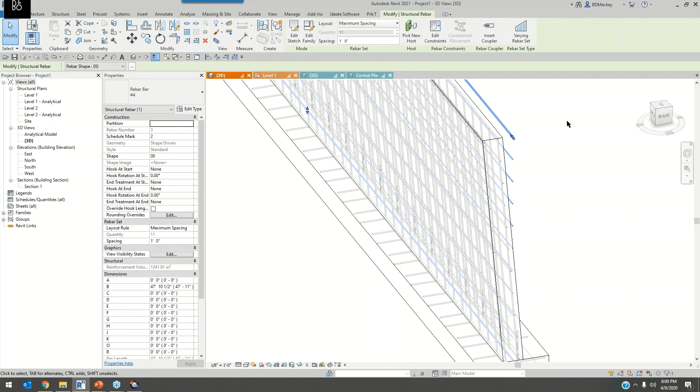So there's a bit of a workaround, like Scott said. We do have this in version 1, but there are some limitations in what we're going to start seeing coming up. And then, not structurally related, I actually meant to start off with this.

The question came up: if you have a tag with a leader, what happens? I just have to figure out which file I did that in... don't tell me I actually closed it. Yeah, so if you had a tag with a leader, the leader does stay this way.

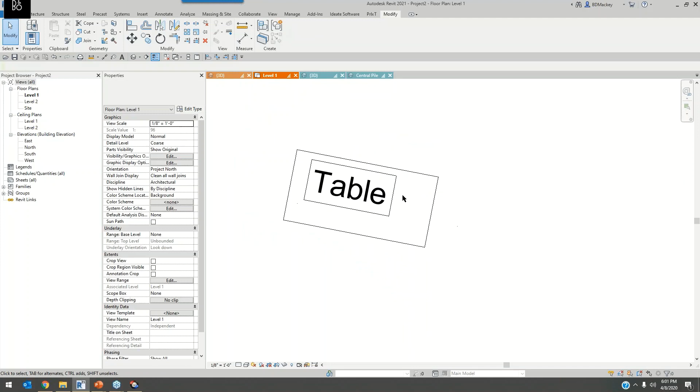This was one thing, but I wasn't sure how they had it done because I was playing with this in beta and never tried it in the finalization. If the tag is now set to rotate with component, you'll see that the horizontal/vertical option goes away, so it will always be rotated with the component. As Scott said, the nice part is if I rotate my object, the tag can rotate with it. We now have the capability to have a leader with that tag being horizontal.

That tag is going to come in and essentially say, hey, my tag is still going to be rotated with it until you adjust the elbow. It's a really bizarre feature—when you first do it, I'll undo that... you're like, oh great, it's rotated, that's not what I wanted. But the second you adjust the elbow, it then says, oh, you probably wanted that tag to be going straight, not rotated.

So we still don't have the horizontal/vertical option, just understand that if you sometimes need that tag to be vertical and horizontal, you might need two separate tags—one that rotates with the component and one that doesn't. All right, I think we're going to go ahead and push this out to Scott and let him jump into the MEP, unless there are some questions that came up.

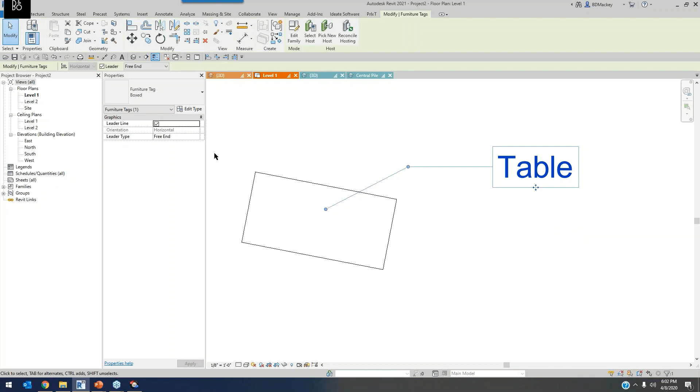There was one question earlier that came up. I was reading through and it was asking if the new realistic view uses the video card—I'm guessing that's asking about GPU usage, and it is. The new realistic view is actually taking into account the GPU performance of your video card. I'm working on a Microsoft Surface Book 2, and the primary processor is an NVIDIA M2000. Decent card, not a super high-end GPU, but it seems to work well for what I've done so far. I am getting a new computer shortly with an even better video card, and we'll see how much better the performance is.

Does it have to be a supported video card?

We let all the manufacturers basically certify their own cards now against what we're doing. So the list you might see of supported video cards is by each individual manufacturer. It doesn't have to be on that list, because if they haven't submitted their criteria to get on the approved list, then we just don't know.

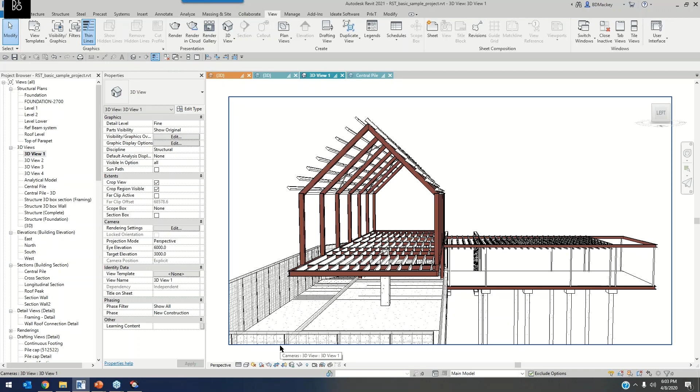Yeah, and as Scott said, we'll see. It's funny to me, all the sample projects now, all the 3D views are pretty much in realistic mode. I did notice that even in the structural sample file, they went into realistic mode with most of the camera views.

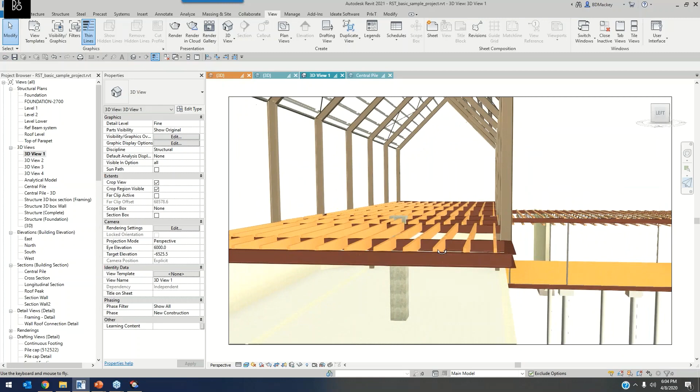As you can see, if I just click the little fly-through, I don't know how smooth it is for you guys there, but I've done this on some larger client projects and it goes pretty smooth. The other thing Scott may not have mentioned is you can use the arrow keys to just walk through, so it's not like the old crappy walk tool. You can use the arrow keys while still using the mouse to get this set up.

You can also use WASD, and correct me if I'm wrong Scott, but we don't have a gravity feature like we have in Navisworks. No gravity yet, and no physical properties, so you walk right through walls, furniture, everything else.

If you're using the walk tools and you point your head up, because in our new fly mode you're literally flying, if you hit W and go forward, you literally will go up. Then you can use Q and E to elevate or go straight up and down, but depending on where you look and where you walk is where you're going to go.

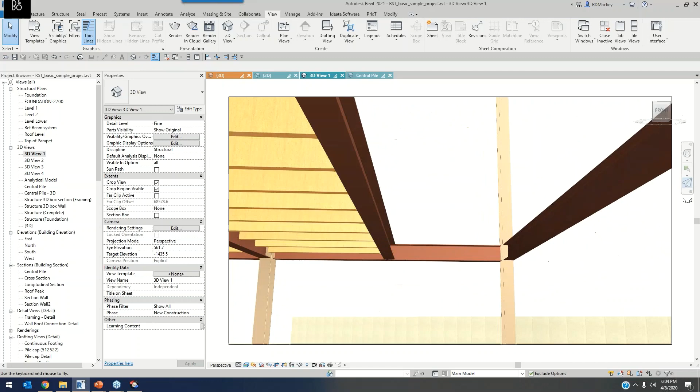So if you come over to a stairway, it's not going to automatically go up the stairs. You just point your head up a little bit, kind of like you would if you were going up the stairs normally. If you get yourself too high, E is down to elevate you down a bit, or Q to get backwards.

But way better than using the old steering wheel tool and having to point and click and push forward and pull back. It's much more gaming style. Except that there's no fire key, right? There's no, you don't need the space bar to shoot anything. So there's no jump or crouch either, but you know.

Well, it's clearly not an Enscape killer, so, or at least not yet, right?

But you're in the product and you're able to do design explorations without having to go out to another product and have something sitting on a second monitor. You can just do it right in your session. So to me, it's much more usable.

Can't walk upstairs. Well, we'll get there. Yeah, that's what I'm saying. You can fly upstairs, but yeah, we're close. When I navigated around, I went up and down stairs without having to have gravity, without any issue whatsoever. I mean, you figure out how to do it. It would be a great tool to have some gravity, meaning solid surfaces to stand on, but at this point, when you get used to doing it, it's really not a killer to the tool. You'll get used to walking around.

I hear the workaround. I hear the rationalization. I get it.

But nice, to kind of kick things off, there was an electrical focus in 2020. A big addition was feed through lugs, which started to open the door for what we can do. Just to talk future for a moment, this is public knowledge, public roadmap type stuff. We do have a heavy focus on electrical in our roadmap in these next coming releases, and not necessarily a full release. We're notorious for our dot releases, so we do have a focus there moving forward.

One of the biggest things that needed to be done, and this needed to be done for quite some time, unless we have some people from overseas, UK, France, there was some adjustments made. Basically we're calling it globalization. Everything was kind of US based or Imperial based as far as how we called out circuits, how we called out different types of labeling and nomenclature. So kind of a revamp in that area.

And so some of these changes exactly aren't going to be applicable, and some of the features will only show up if you're starting from one of those templates. So if you use your out of the box Imperial templates, it's not going to come with any of these settings, like that circuit naming choice. That's a pull down on a family, but it's also a setting that can be pre-built inside of a project template. So from a US standpoint, not really hitting anything in that regard.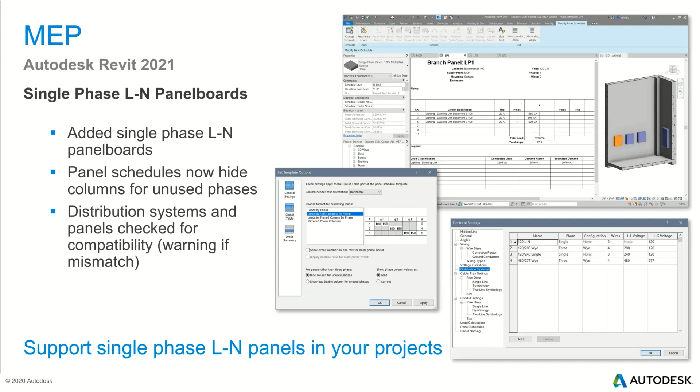Switchboards got an entire dedicated slide here, but really what changed in this regard was a parameter name change. In 2020 and older, there was max number of 1-pole breakers, because essentially the switchboard was a panel as far as how Revit kind of thought about it. With the part type now in an electrical equipment family, if you change that to a switchboard, it will get rid of that max number of 1-pole breakers, and it's going to add in the max number of circuits as a parameter there. So it's cleaning up that a little bit, making it a little bit more logical, not only from a connection standpoint, but also how it's calling things out.

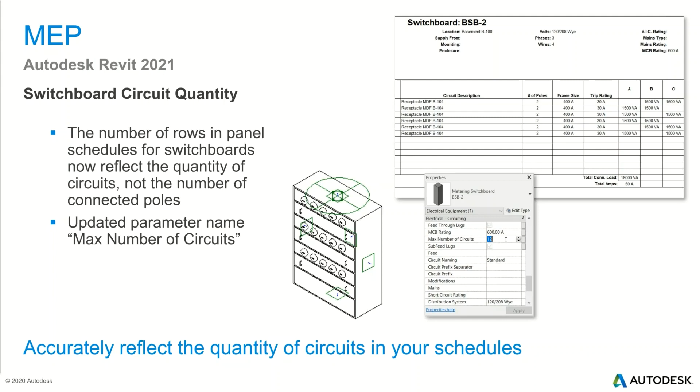A new button was added into our panel schedule area. So again, if I'm going in and setting up 1-pole, 2-pole circuits, it always went to phase A when hooked up to a switchboard. You weren't able to go in there and actually dictate what phase that was connected to. But now, similar to moving a load to a different circuit, we can go in there and switch what that phase is actually on. So if it's on A, we can switch it over to B, and so on. A little bit more control as far as that switchboard methodology.

Also, in previous versions, if we put spares or spaces in there, we could always put a rating on that. We could put a dummy load in there if we wanted to fake some existing loads and rename the circuit description, but we couldn't change the number of poles or the frame size on a spare space. Now we've got the ability to do that as well.

This is more of a housekeeping type feature. Every sheet that we would look at in the project browser, if you would expand it out, it would have those views defined underneath, like lighting plan, level 1, or first floor mechanical plan. But when you went to a sheet, it wouldn't tell you what panel schedules were on that sheet.

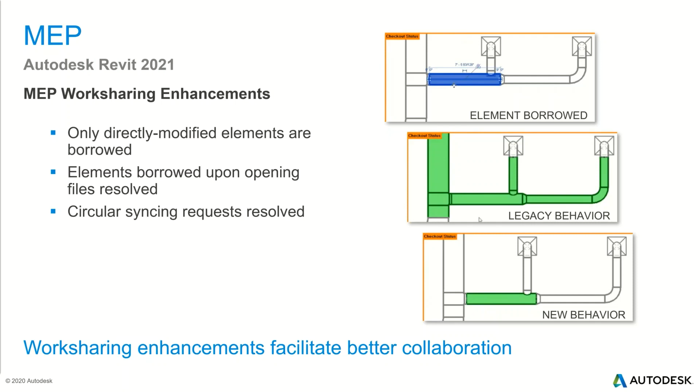And with 2021, P&ID Modeler. So this is not a new feature to Revit. P&ID Modeler, I think, got added in 2018 or so.

For those unfamiliar with it, if you were working in a Plant 3D project, they have smart P&IDs. If you lay those out, that is a collaboration project for plant. What has changed for 21 is that we can now access those through the BIM 360 Docs next-gen platform. Last week, March 25th, Collaboration for Plant 3D was released and made that available. So now we've got that same compatibility on the Revit side of things as well.

So if I've got any of those objects modeled from a schematic standpoint, then I can leverage some of that data and pull it across and use it inside of Revit as well.

It does not solve the missing feature of schematics in Revit, no. We do not have one-line schematics, we don't have single-line diagrams from a tool standpoint. That's still drafting lines, 2D symbol families, detail items, and building those out. That is on our public roadmap, talking about building schematics, but again, no timeline as far as when something like that would happen.

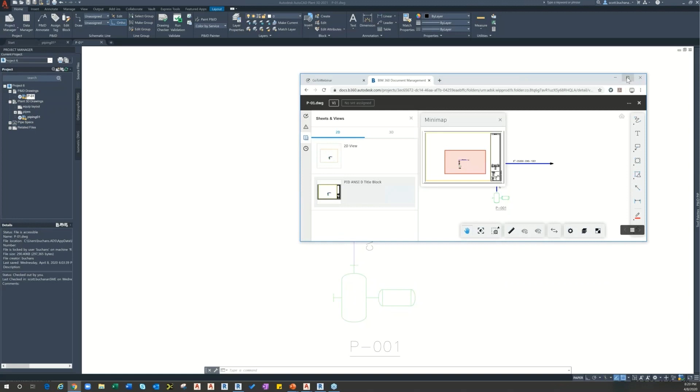And with our release last week, we made Plant 3D available inside of BIM 360. So this is just showing that same thing is being opened there. All data retains, all the fancy, wonderful features of BIM 360, can be applied to that as well.

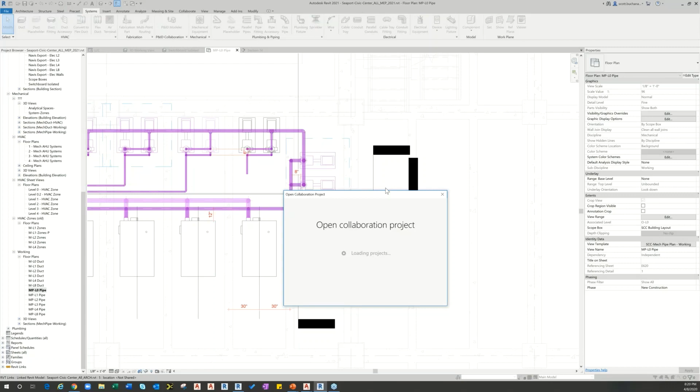And then what that does downstream in a Revit environment is that project, again, has to be shared to BIM 360, and then you're going to have a P&ID Modeler tool here. Now, this did work in older versions, but it was through BIM 360 Teams. So if Plant 3D was shared in a BIM 360 Teams project, then you could gain access to it and do it that way.

So I'm essentially opening up a collab project, and it would show me any P&ID drawings that have been created in there. So in this particular one, I just had a P&ID P-01, and if I had multiple lines going down through there, it would show me, like, I numbered that one 1001.

Just a schematic line number. So I would see all those lines, I'd be able to come across, and then it's going to show me what is actually in that run that I've got.

Now, if I go to try to place this, it tells me, hey, you've got to map these. So how in the world does Revit know what to come in for that particular pipe or that valve, et cetera? Inside of, and you can do this in your actual project template, your setups and all of that.

Got mad because I hit cancel on the save again.

There we go. So it's going to look for mapping, and the mapping is going to actually define what does everything equal. And again, these are all things that can be set up ahead of time. It's looking at a list of P&ID services. In the Revit world, those are systems.

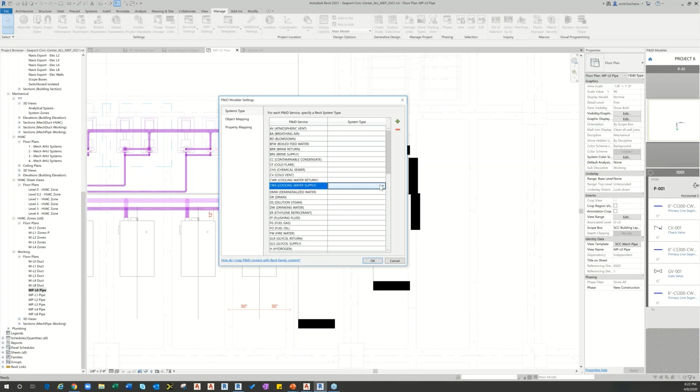So that line that I modeled, it was a cooling water supply line. So I'd have to map it to a Revit system that's been built in this project. Now, I didn't have one built in here, so I'm just mapping it to chilled water supply.

And then same thing from an object standpoint, this is what the P&ID object is referred to as. So it's a primary line segment, and you get to tell it that it's a particular Revit pipe type. So if I had my welded pipe type set up, if I had a flange pipe type and all those configured, I could choose those out of the list. I'm just going with standard.

And then same thing with pipe accessories. Now, what it does is it tries to scan inside of your project to see if you have any of these Revit families loaded that match or have some of the same names inside of it.

So on the left, I didn't do anything here. It just found that there was a ball valve in the project. Now, if I had six different ball valves or six different check valves, I'd have to come in and choose which one it was, right? So it automatically picked those.

I'll show you where it comes in and gets that as well. You can do it and break it down to fittings and all that type of stuff too. And if you want to map equipment, typically you're already going to have the equipment model placed in there, but it's got the same workflow.

So if I wanted to come in and say, hey, the horizontal centrifugal pumps from the P&ID world equals this centrifugal pump family, you can take it that far if you want to. And then there's property mapping, which is looking at the tag data on the equipment and the tag data on the pipe accessories. These have to be shared parameters.

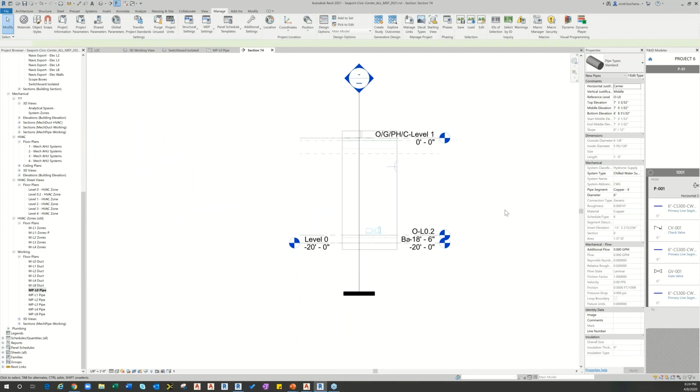It's going to automatically choose that pipe type. So if I look in my properties, I mapped it to standard diameter, it went to six-inch. It knew that it was that six-inch pipe and started to draw with it. Now I'm in a terrible view to draw that going vertical, so I'll restart. But as I choose that, it's grabbing that data, and that's the only thing it's getting - the size information and the pipe type to draw with, then it lets me draw.

I'm not going to map that entirely, just to show that it does come across. And in that list, it's showing green because I've satisfied the placement of that - it's saying you've placed that six-inch line in there. So it's kind of a validation that you get to do.

Same thing here - if I went to the check valve, once I click it, it's going to load up that actual family as well. It found the size. I don't care where I'm dropping this stuff right now, just getting it in. Then I'll bounce over and show that data - I'm not going to place all these components, but just to show you what that really did for me.

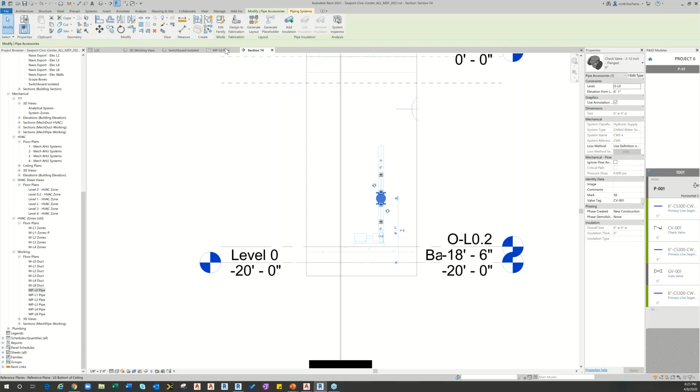Valve tag CV001 - so it just matched that data coming across. There's not a bi-directional connection or anything like that; it really is just a one-way data push. And that's actually true in Plant 3D as well, because it has the same functionality with its model-based objects.

Now, I did mention you can place the equipment if you want. So it's saying, hey, from pump 001 - I could have triggered that. But again, if I'm in Revit, I've already laid out my equipment - that's one of the first things I'm doing. But you can see it will map to it as well.

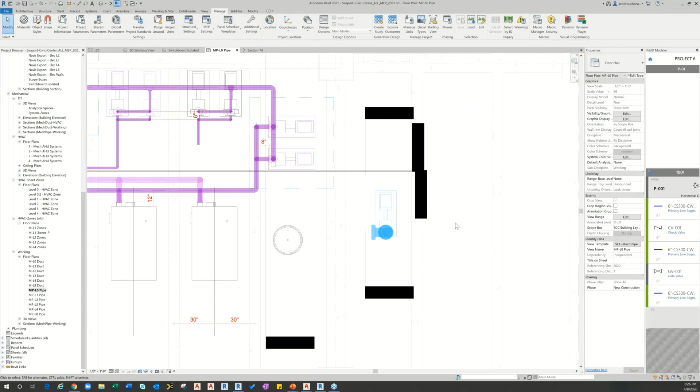Unfortunately, there's no more clarification from Adrian, so we can consider that a comment. Adrian connected with me on LinkedIn, so feel free to reach out to me on LinkedIn too,

There you go, because I saw he was electrical. I was looking at everybody's titles, and I remembered Adrian was electrical, and I saw electrical. So, but yeah, you can expand upon that, whether it's true phasing of objects, like Revit phasing.

He says it disconnects the conduit. Yes, it will do that. The phasing is, yes, phasing is still as it was yesterday in that regard.

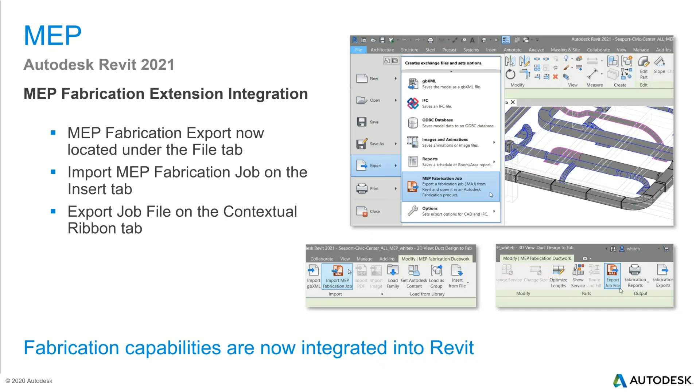And with that, I'll turn it back over to Mr. Davis, and I'll check if there's any chat questions.

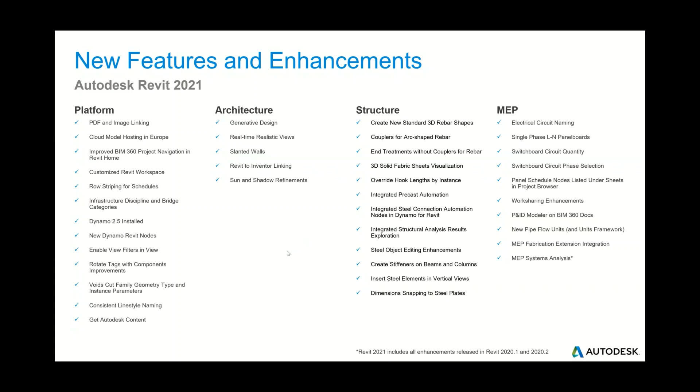And with that, we'll turn it back over to you, Jay, for final thoughts. Oh, you're muted - Jay's muted.

I am the king of sound on this meeting - the first 6 minutes were just a debacle. I will edit that out for the recorded session. Oh my God.